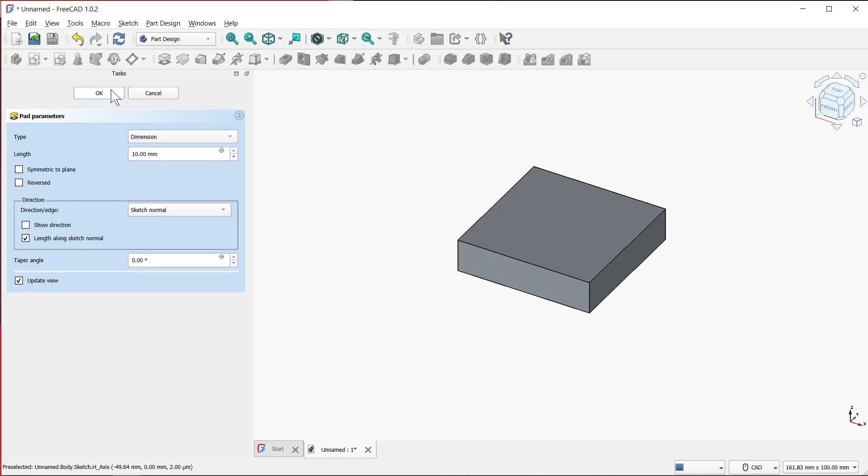Now click the close button, and select pad. Then press OK, and select a side of this object. Then create a new sketch by clicking this option.

Now go to create circle by center and select this option. Then draw a new circle, type 3 millimeters, press enter, and click close.

Then select hole, and change profile from none to ISO metric regular profile. Change size to M3, and change depth from dimensions to through all. I recommend checking the option threaded, and we need to check the option model thread. I also check the option to update thread view.

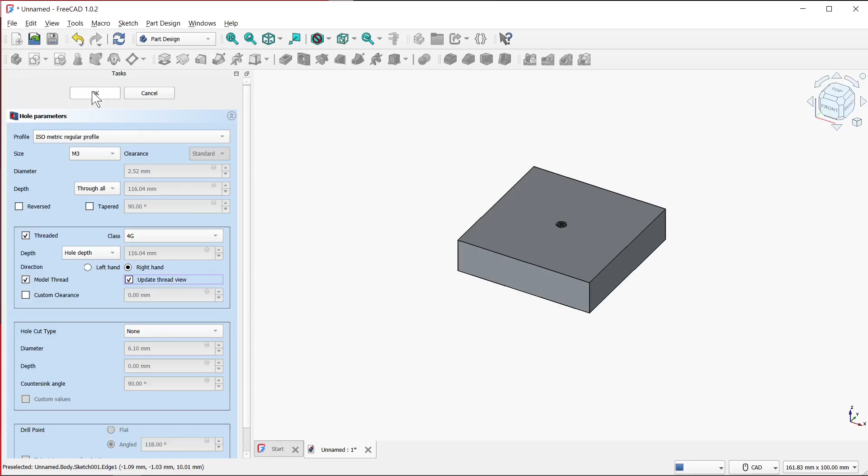Then click OK, and as you see our object has been successfully created here.

Now we need to save this object, so go to File and select Save As. I type a name for this project, for example simple 1, and press Save.

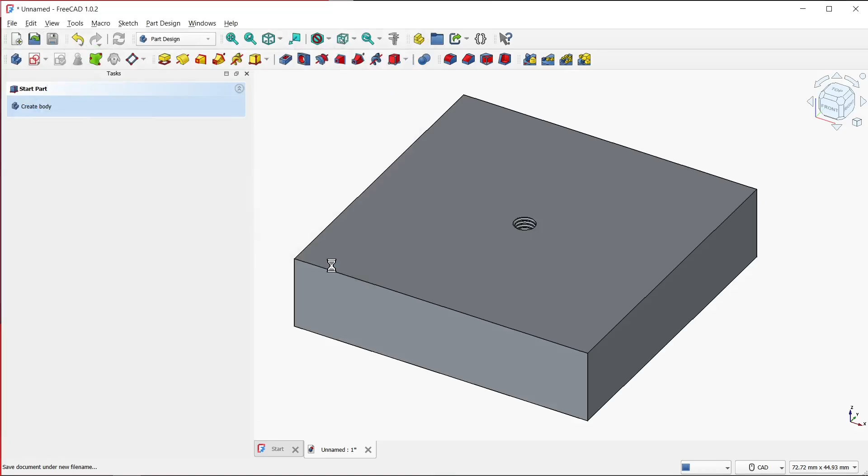Then click this option to create a new empty document, and we need to create another object. Click create body, click create sketch, select the XY plane, and click OK.

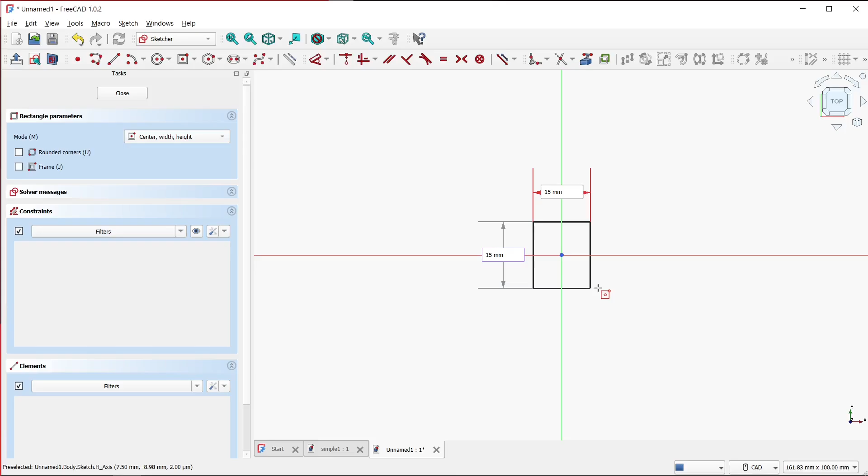Then create a simple rectangle, click this option and select centered rectangle. Draw the rectangle with dimensions 15 millimeters, press tab, and type 15 millimeters too. Then press enter, click close, and select pad.

Then click OK. Select a side of the object, click create a new sketch, and then draw the same circle by clicking this option and selecting create circle by center.

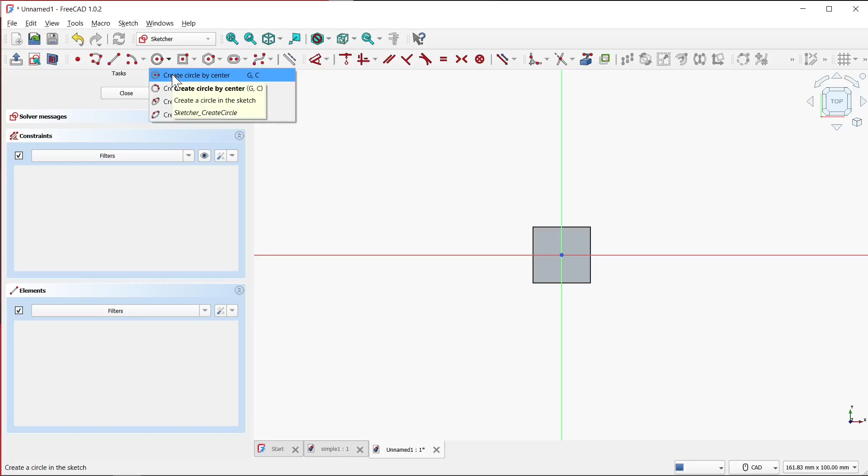Then draw a circle, type 3 millimeters and press enter. Click close, and select hole.

Change profile to ISO metric regular profile, change size to M3, and change depth from dimensions to through all. Then select threaded, select model thread, and check the option update thread view.

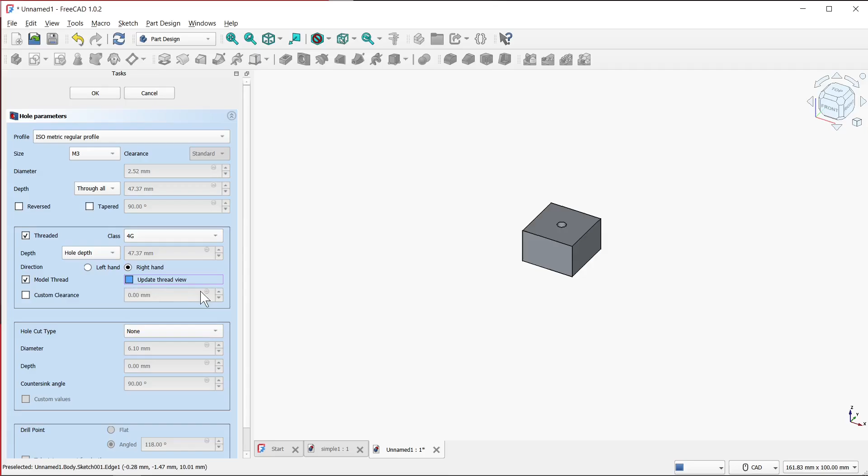Then press OK, and I need to save this project, so I go to File and Save As, and type maybe simple 2.

Then press Save, and create a new document by clicking this option. Change mode from part design to assembly, and click this option to create assembly.

I click this option to insert components, select the first body from the first document, and click save. Then I type maybe simple assembly, and press save.

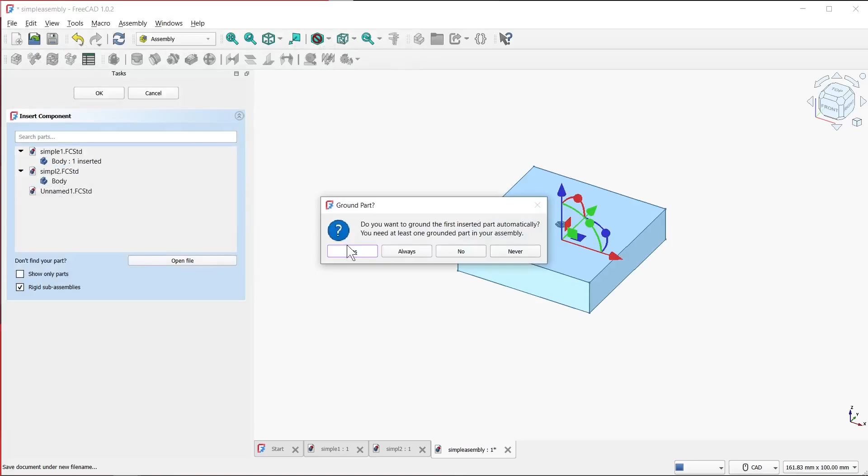Then I click yes, because you need at least one grounded part. It will be locked here. So now I need to add another body, so I click on it.

How you see it has been successfully inserted here. So if you press the middle button of your mouse and press and hold the right mouse button, you will be able to change the view.

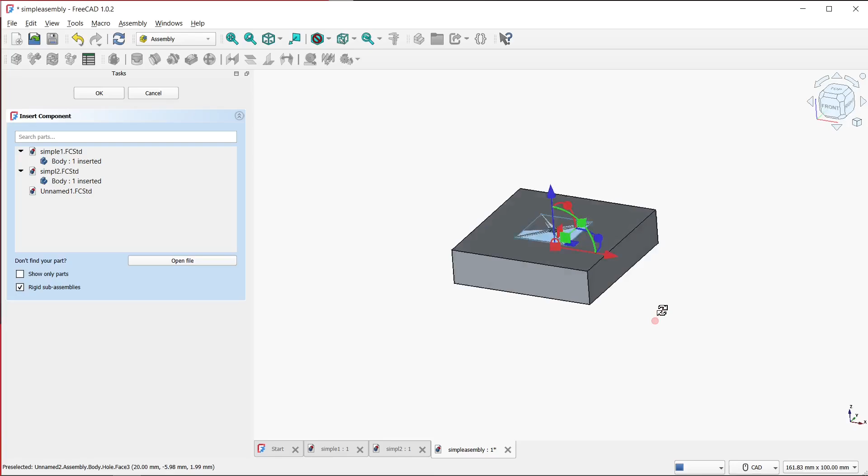For example, I will transform this object to this position, and now we need to click the OK button.

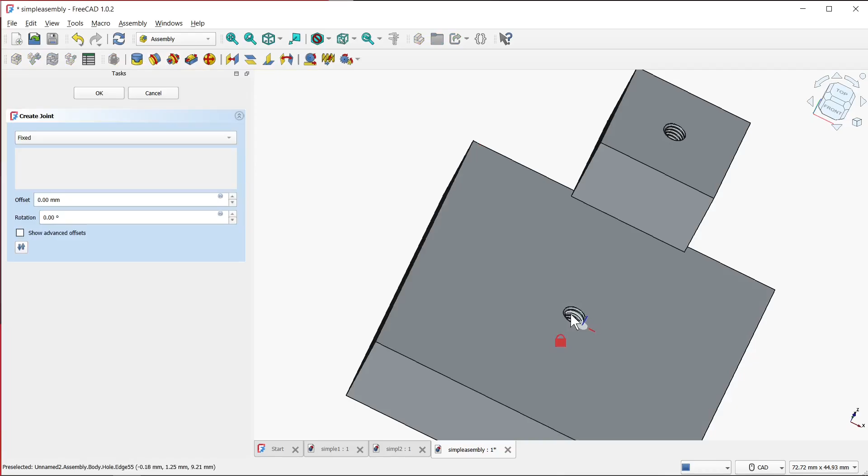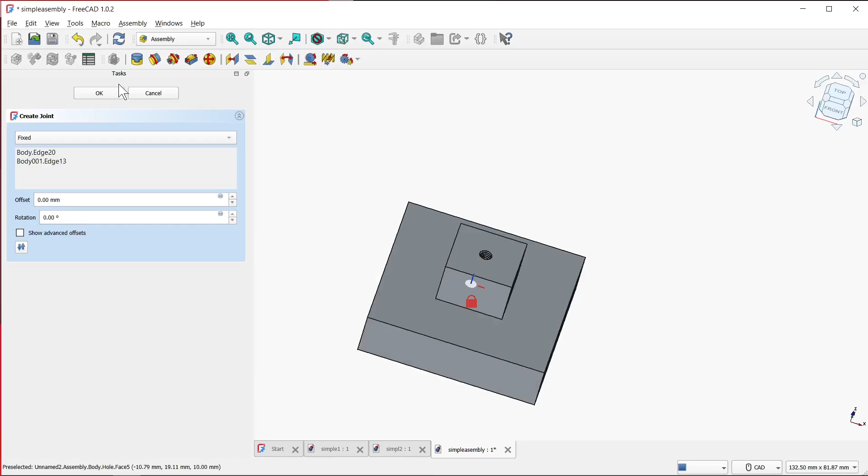Now if you would like to assemble these parts, you need to go to this option: create a fixed joint, then add a part here. For example, I select the upper edge of this hole, and repeat this action for this object. So we need to change the view, and I select this edge. After that our parts will be assembled, so now we can click OK, and we can change the mode from assembly to fasteners.

If you don't see fasteners here, you need to add a new add-on. Go to Tools, go to Add-on Manager, and search for fasteners, then install this add-on. It is very important to install it.

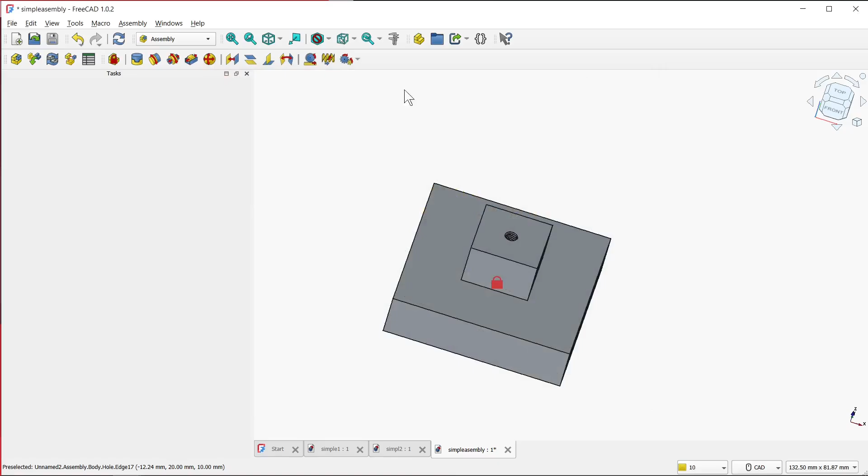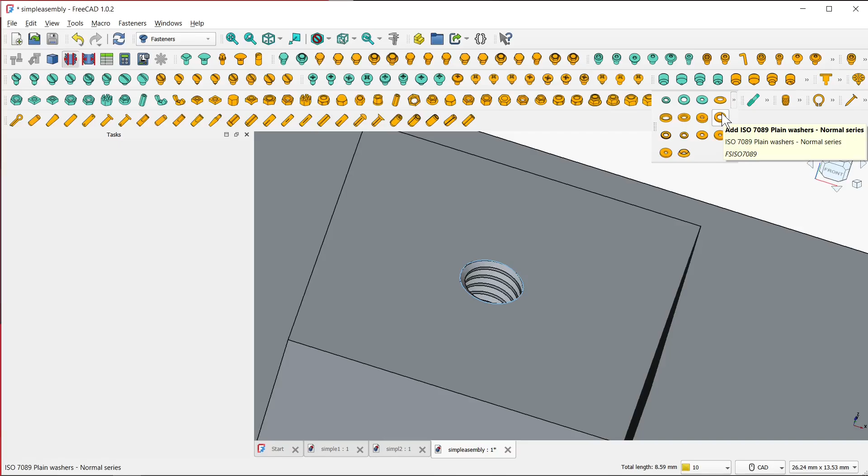So if you have the FreeCAD Fasteners Workbench Addon, you need to change mode to fasteners, and now we select this hole. I select the hole, press and hold Ctrl to select all edges, and after that I go to these options, and select this washer with number 7089, and select this option.

And of course remember that this is only an example of a construction in FreeCAD. I recommend you test other types of screws.

As I said, it's only an example, so for example we can select this screw again. I press and hold Ctrl on my keyboard, and select this screw. We need to select it, and after it's selected, I click the right mouse button and select Delete. Alternatively, you can press Del on your keyboard.

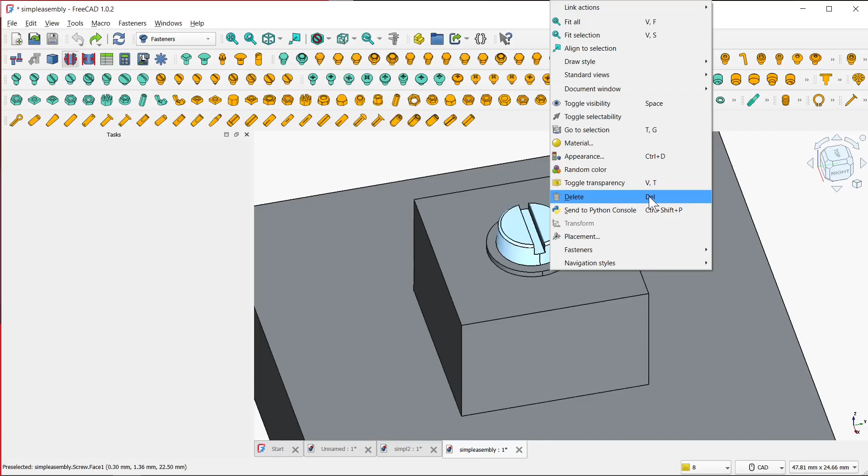It's a shortcut, so I recommend you learn this shortcut and try how it works. So I click here. Now if you would like to add another type of screw, you need to click on this hole again, select this edge, and then for example I can select this type of screw.

Or if I click Ctrl+Z, I will undo the changes. For example, I can select this type, or this type, or maybe this type. Everything depends on your preferences. Remember that the types depend on your construction and on the applicable rules.

So I recommend you test this add-on. It is a really useful tool.

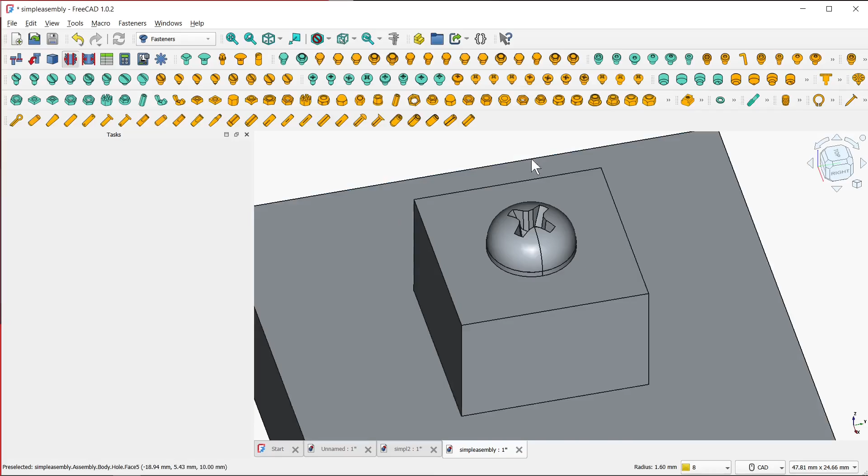So now maybe I will go back to the previous settings. I select this option to add the DIN number 84, superseded by ISO 1207, slotted cheese head screw. I click on it, and as you see, it really works, it looks really great.

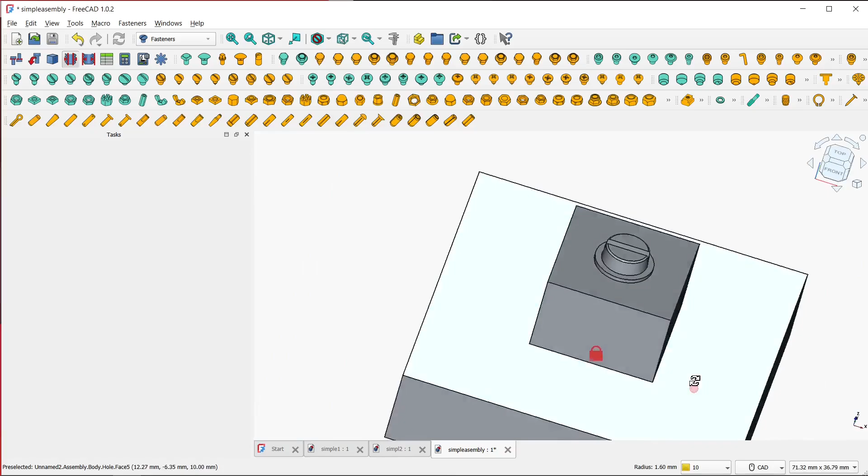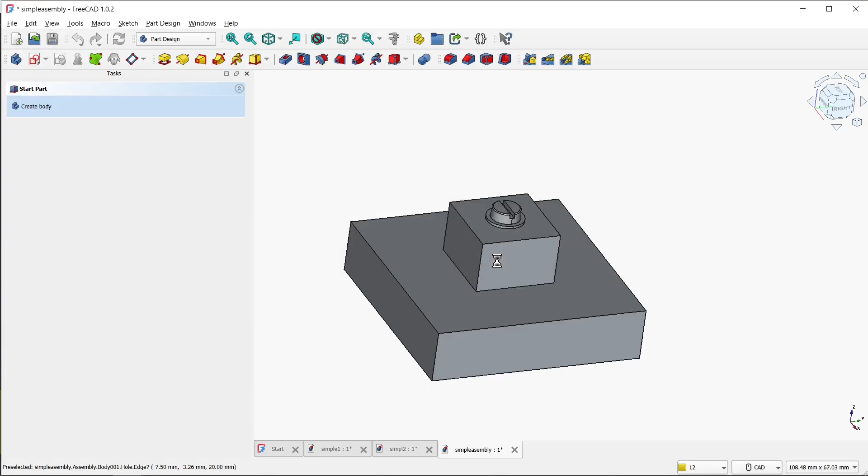And don't forget to save this document, so I go to File, I click Save, and after that I need to click Yes, and everything will be successfully saved. Thank you for watching my tutorials, and see you in the next videos.